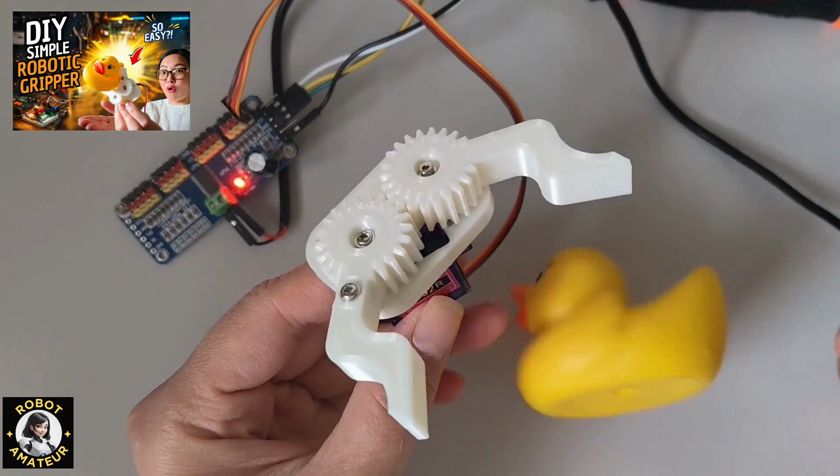This video is part of my PicoPal robot arm series, where I first built the gripper, then started designing the arm itself with the help of AI. In this video, I'd like to share the reasoning process while designing my robot arm. Not just what I designed, but why I made certain decisions, the trade-offs involved, and the problems that I was anticipating even before I print anything. Because CAD is only part of robotics, the real challenge is how to think mechanically.

Before opening CAD, I first defined the scope of work, because real engineering often starts with requirements, not the drawing directly. For this robot arm, I want it to be affordable, beginner-friendly, simple to assemble, capable of picking up lightweight objects. For example, I intentionally limited the robot to 4 degrees of freedom because every extra degree of freedom will also add weight, torque demand, wiring, complexity, and potentially extra failure points.

I also defined the workspace to be roughly 20 cm of reach, and 5 mm precision would be good enough for tabletop experiments. Not industrial accuracy, just good enough for a beginner project. So this mindset already eliminates a lot of bad design decisions in the early stage, because constraints are not limitations, they are the design compass. They guide the design.

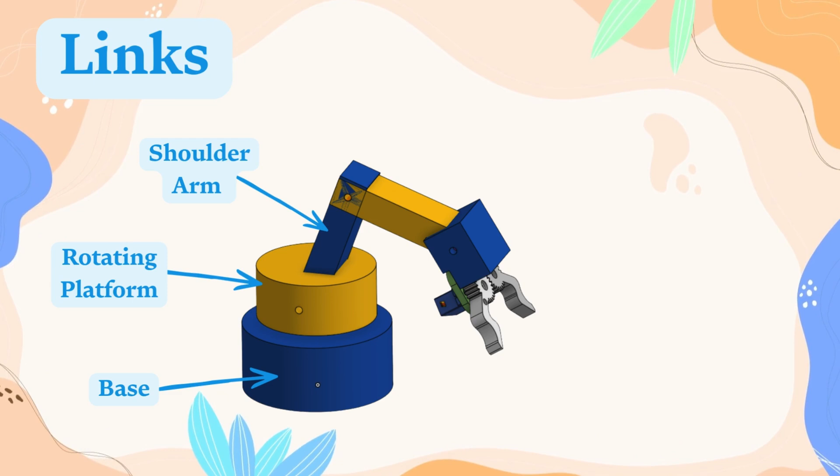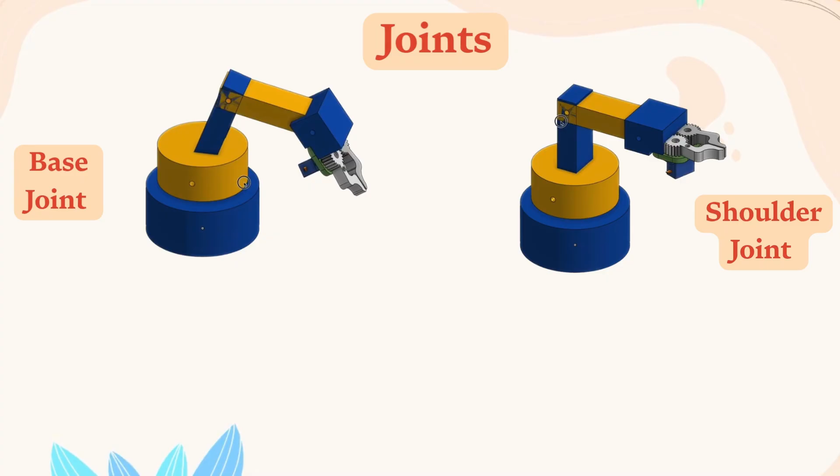Once the constraints are clear, I started dividing the robot into two main elements, links and joints. Links provide structure, joints create motion, and most of the difficult mechanical problems happen at the joint level because they need to carry the torque and maintain the alignment. One major design decision in this robot arm was using mostly direct drive joints. That means the servo directly drives the next link without using any complicated transmission system. Now, this is definitely not the most powerful solution, but my goal was to make a robot that is easy to assemble, debug, and understand by beginners.

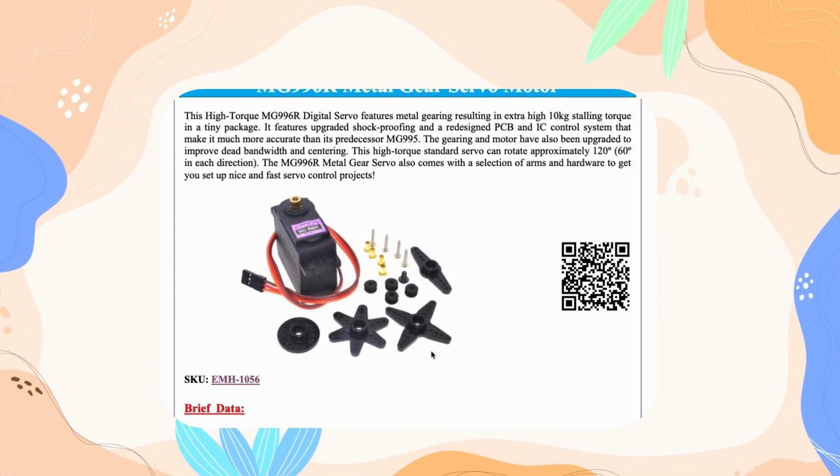At this stage, I also selected the servo choices, not final validated decisions, just reasonable starting points. For lighter joints, I used SG92R servos, and for the base, I chose to use MG996R because I expect the base to experience higher torque load. Then I moved quickly into a sketch before jumping into CAD because I wanted to answer one question: does the mechanism overall make sense?

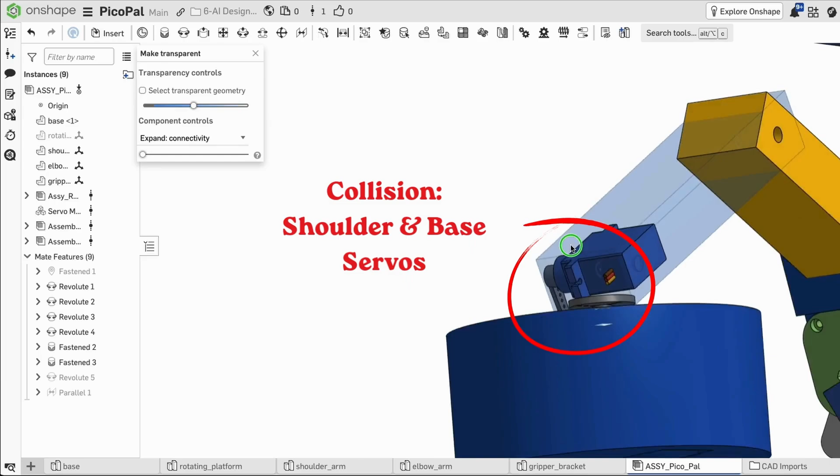One of the important things I've learned while designing this robot arm is to test the motion early. Before refining details, I added the temporary mates and started simulating the motion of the arm. And almost immediately, problems started appearing. The shoulder collided with the base, some servo placements became unrealistic, certain motions looked mechanically awkward. This is exactly why early mechanical testing matters. One huge beginner mistake is polishing the CAD before validating the movement. Because if the mechanism itself doesn't work, nothing else matters. So instead of refining geometry, I focused on joint positions, link proportions, and the range of motion.

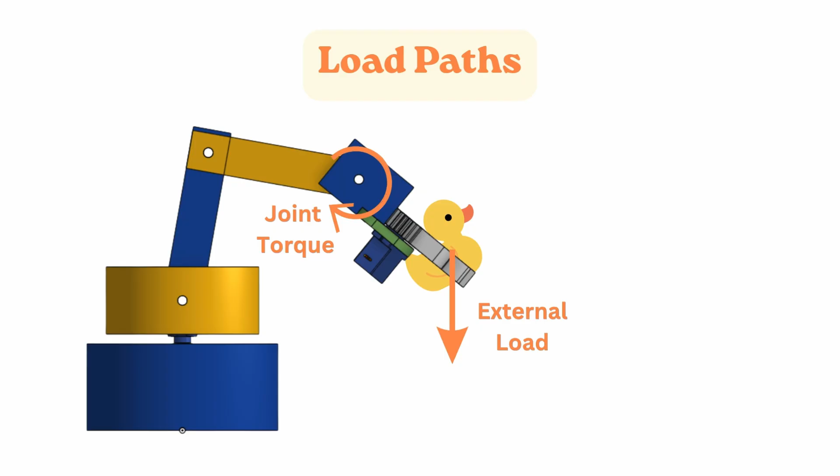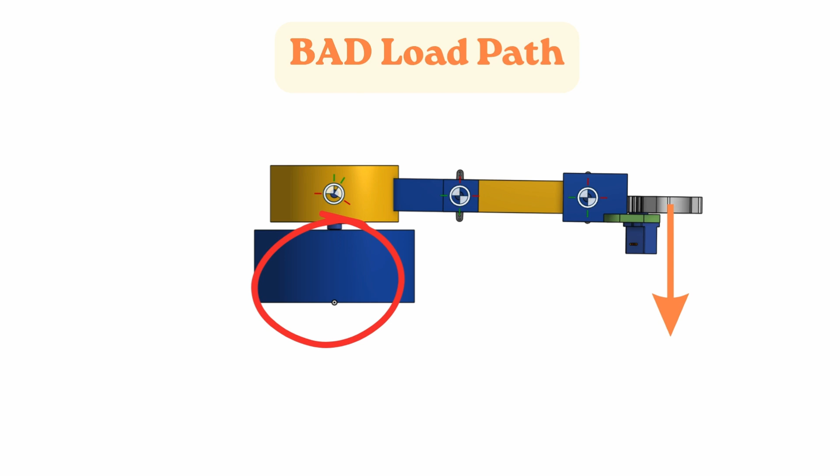Once the motion looked reasonable, I started refining the joint structures themselves. And one concept that became very important is load paths, meaning how forces travel through the mechanism. For example, servo motors are designed to output torque through their shaft, but they are not designed to handle large bending loads. So if the entire arm load sits only on the servo horn, the shaft will experience large side force, which can damage the gears over time. So on several joints, I added support on the other side using standoffs and screws. In theory, this should help create a much more stable rotational axis.

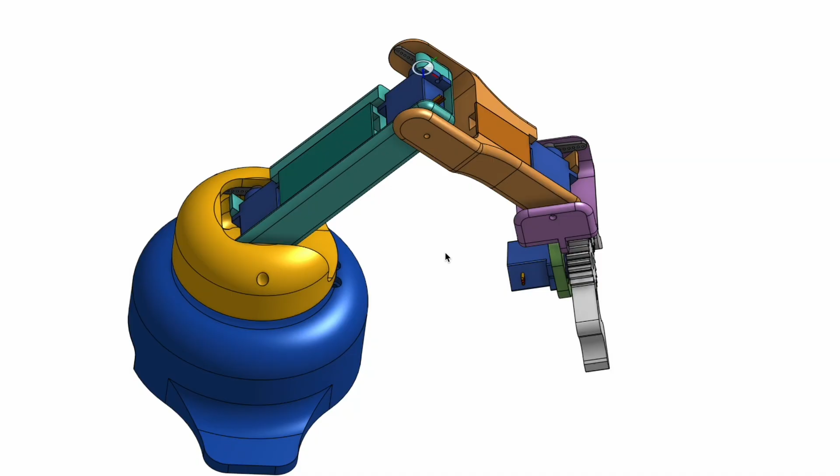I also try to avoid over-engineering every mechanical component, only the necessary parts. For example, the shoulder joint is likely to experience high load, so extra support for the servo horn mount makes sense. A big part of engineering is knowing where complexity is actually necessary. Some joints need reinforcement, others can stay simple.

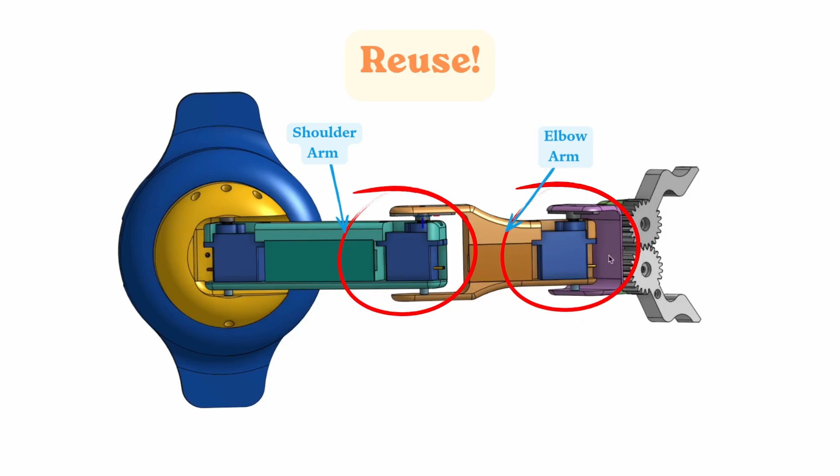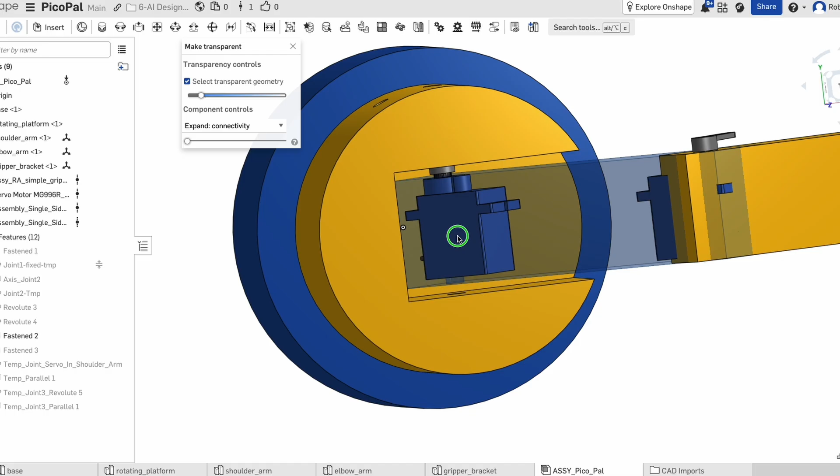One thing that I have started appreciating during this project is reuse. For the elbow arm, instead of redesigning everything, I reused part of the shoulder arm. Because once a part is mechanically reasonable, reusing it will save us design time, manufacturing effort, and testing effort. This is also where parametric CAD becomes incredibly useful. When I discover collisions or weak areas, I could modify a few dimensions and the entire assembly updated automatically. That flexibility makes iteration much faster, and throughout this project, the entire assembly keeps evolving through adjusting clearance, simplifying geometry, reinforcing weak areas, and improving assembly access. Real engineering never happens in one attempt. It evolves through iteration.

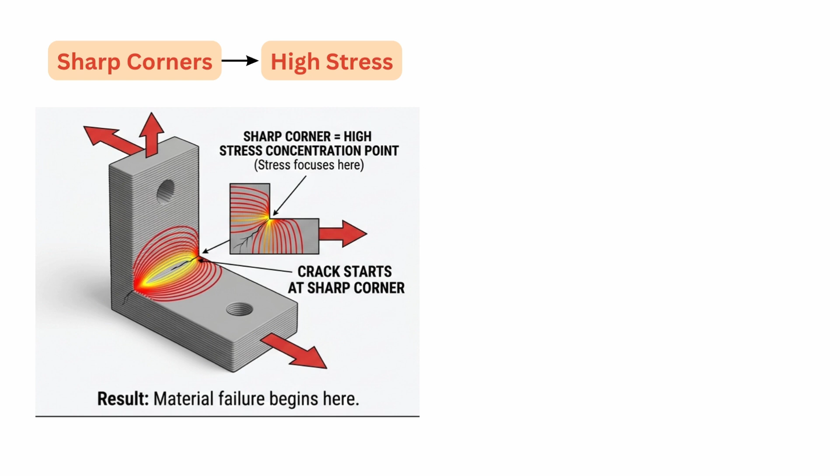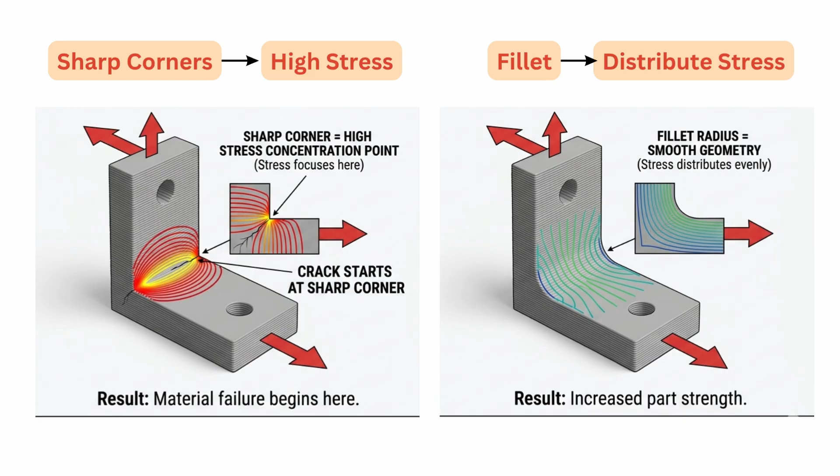Towards the end of the design phase, I started refining the mechanical details. Things beginners, including me sometimes, tend to underestimate, like fillets. Sharp corners create high stress concentration points, which means cracks often start there in 3D printed parts. Fillets help distribute the stress more smoothly across the geometry. This kind of small change makes a big difference.

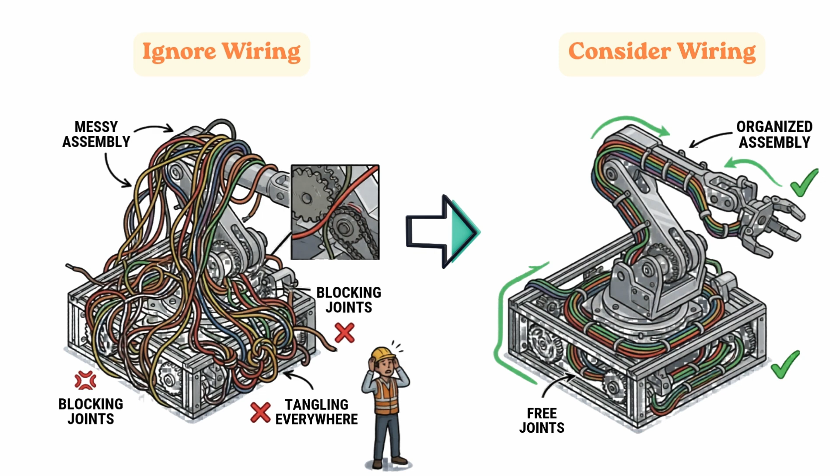I also started planning cable routing early, because if wires are ignored during the design phase, assembly quickly becomes messy. Cables start rubbing on moving parts, blocking joints, and tangling everywhere. So I added holes and paths directly into the design. Small details like this are often the things which make our prototype more realistic mechanically.

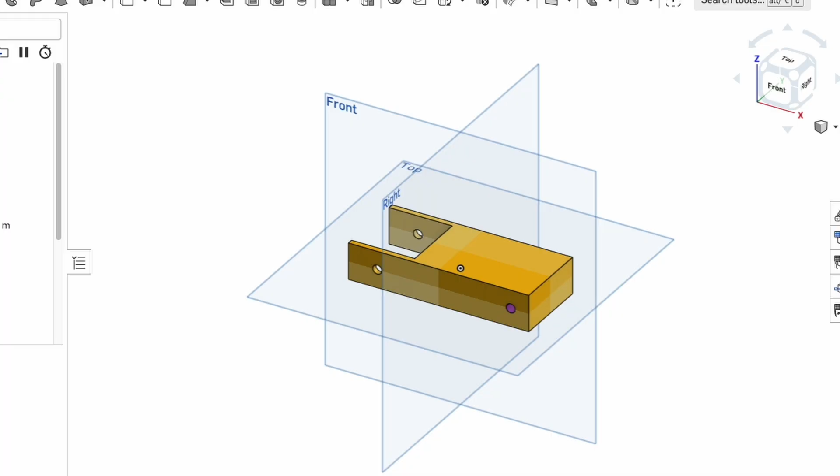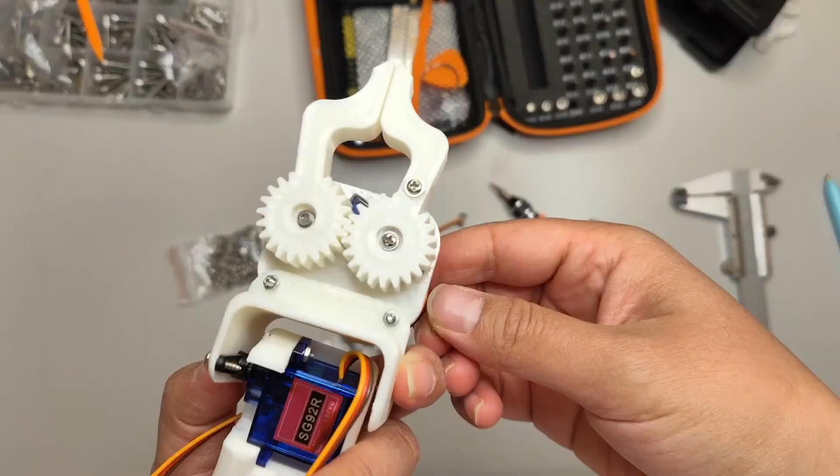This project taught me that robot arm design is much less about CAD itself and much more about engineering thinking. Because once the robot becomes physical, that's when reality starts exposing the bad decisions. And based on my torque calculations, I already suspect the shoulder joint is undersized. So in the next video, I will print and assemble the first prototype, test this direct drive design, and see if the arm can actually survive the real loads or the whole joint needs a redesign. We are about to find out, because CAD is one thing and reality is another.